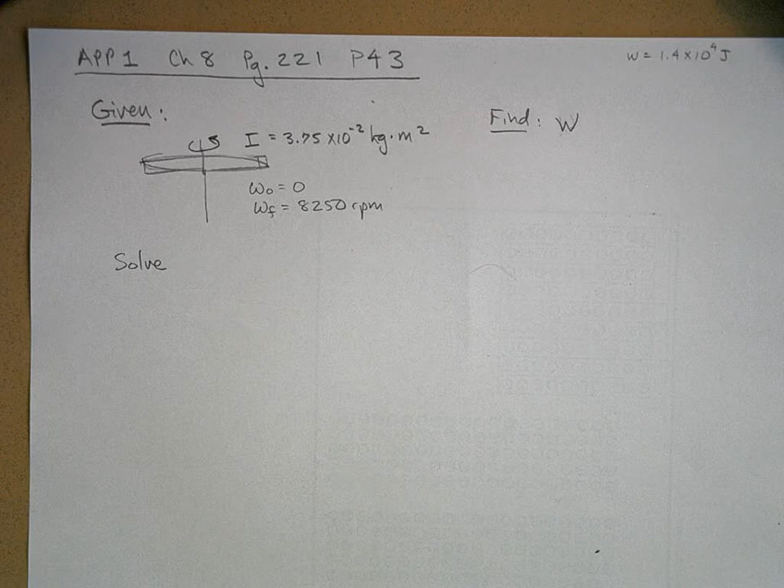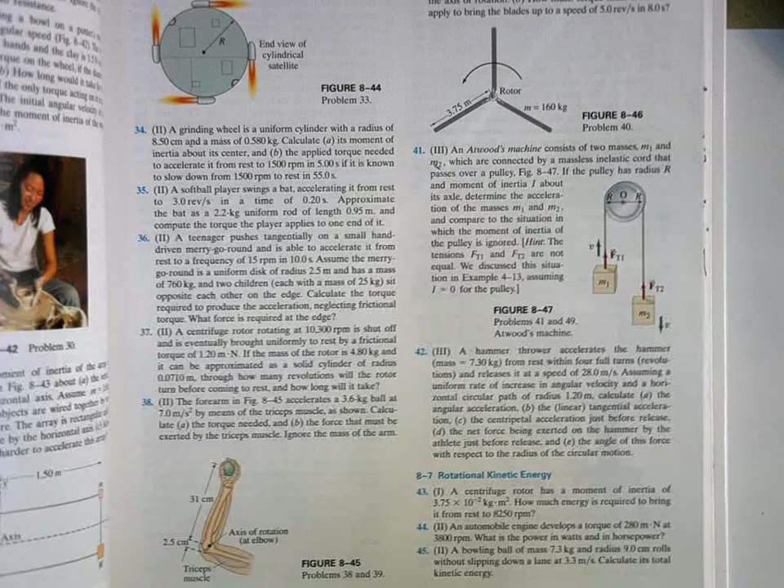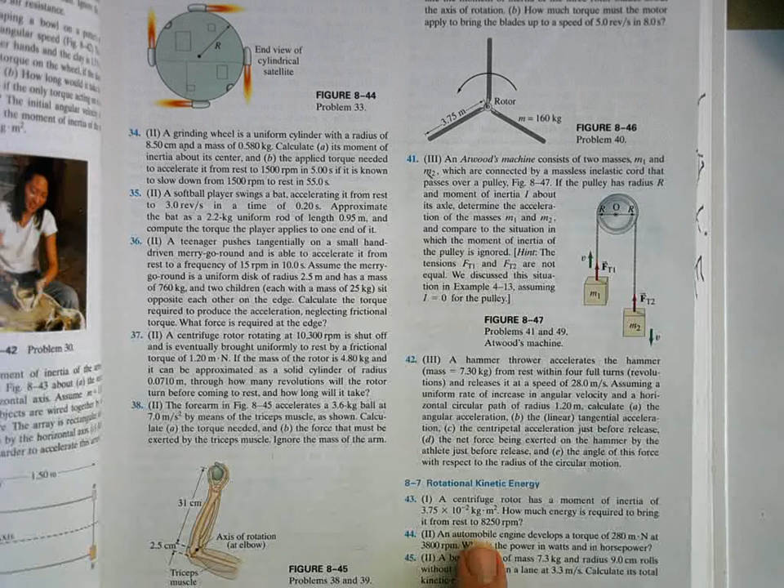Let's do problem 43 on page 221 in chapter 8. And I'll read the problem from the book. Right here, it says, a centrifuge rotor has a moment of inertia of 3.75 times 10 to the negative 2 kilogram meter squared. How much energy is required to bring it from rest to 8,250 RPM?

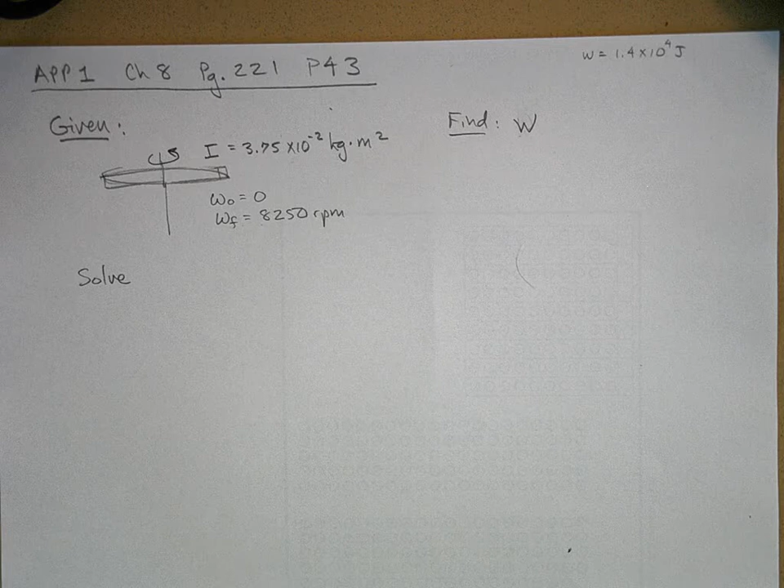So here is the problem. Oh, and here it is. And so we want to know how much work does it take to spin this thing up. So this is just some object. It's a centrifuge, some part of a centrifuge. We're going to spin it really fast. And we want to know how much energy is it going to take. How much work do you have to do to get it to that speed?

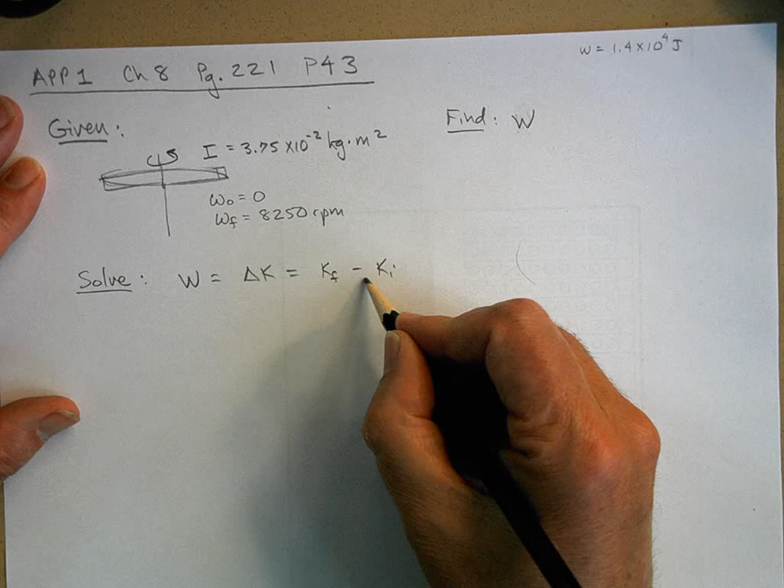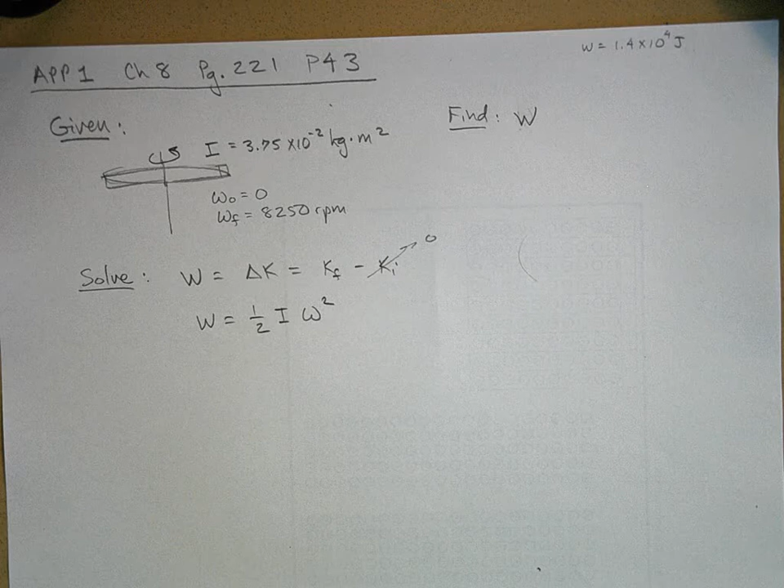So, well, the work done will equal the change in kinetic energy, which is K final minus K initial. And the initial kinetic energy, it starts from rest, so this is going to be 0. So the work done is going to be our final kinetic energy, which is 1/2 I, the final angular velocity squared. And I know what I is. All I need is omega, but it needs to be in radians per second for this to work.

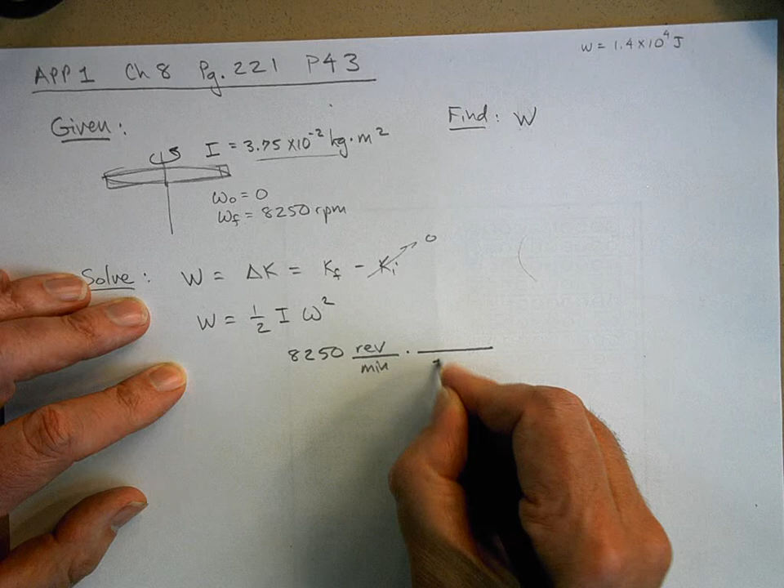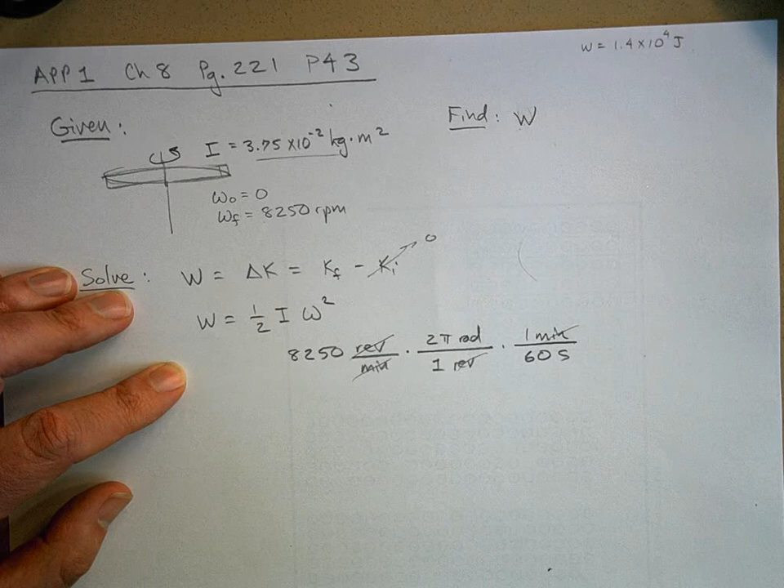So 8,250 revolutions per minute. We got to change this. 1 revolution is 2 pi radians. And 1 minute is 60 seconds. So by doing unit conversions like this, you can tell whether to multiply or divide. Some of you got these a little bit mixed up. So get on it when it comes to unit conversions. The most useful thing you'll learn in here and in chemistry is how to do unit conversions.

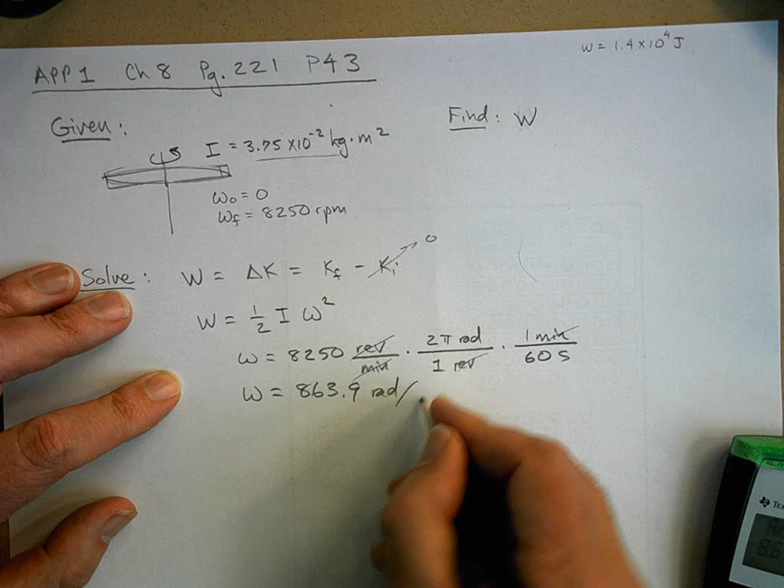Anyway, so this is omega. So omega is equal to, well, let's see, 8,250. Oh, wait, let's clear my calculator. Times 2 times pi, divided by 60 equals, and I get 863.9 radians per second. So now I can figure out how much work is done. Notice I make a capital W, not an omega.

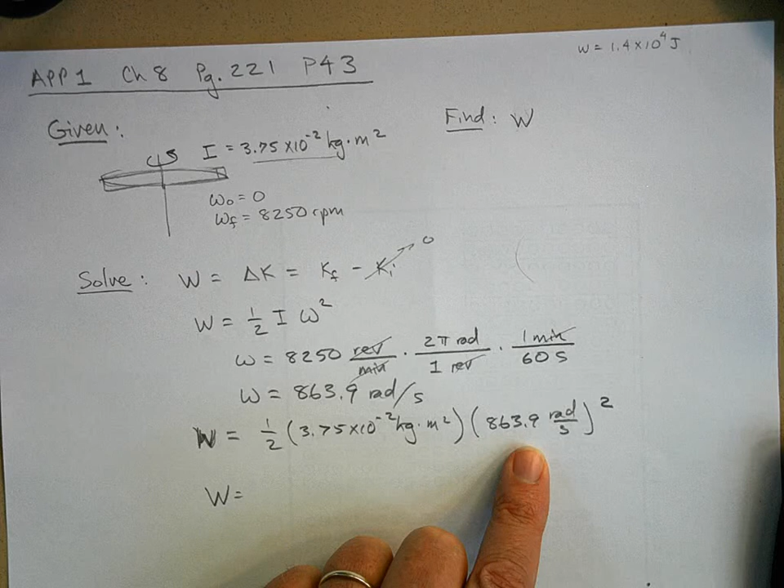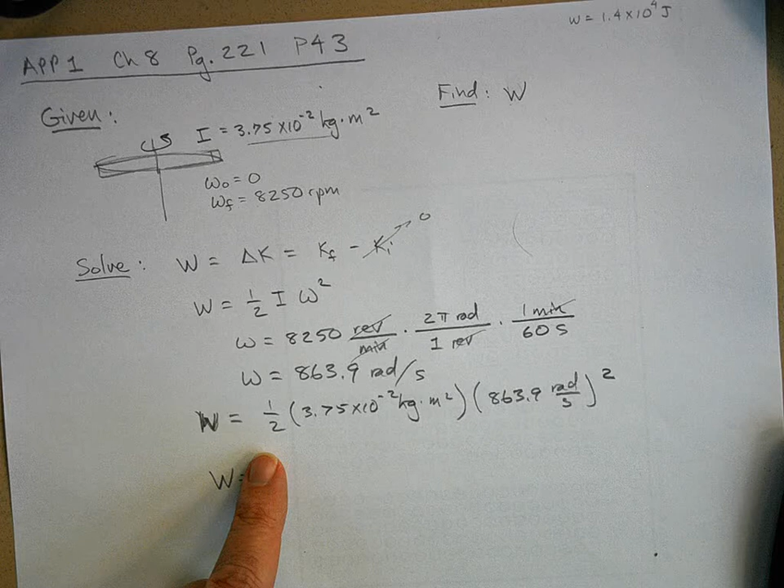1/2. Now what is I? 3.75 times 10 to the negative 2 kilogram meter squared. And then this is 863.9 radians per second squared. So this number is already in my calculator, so I'm just going to square it. And then multiply it by 3.75 times 10 to the negative 2. And then divide it by 2. And I get 1.4 times 10 to the 4.

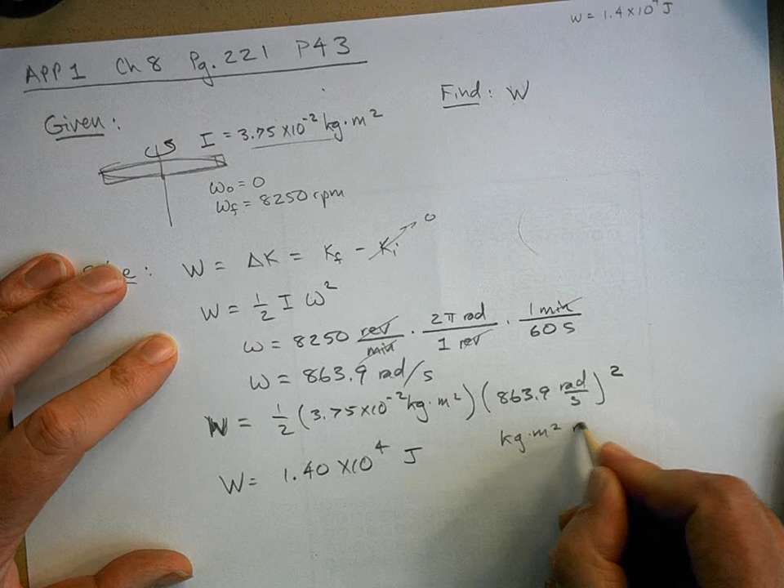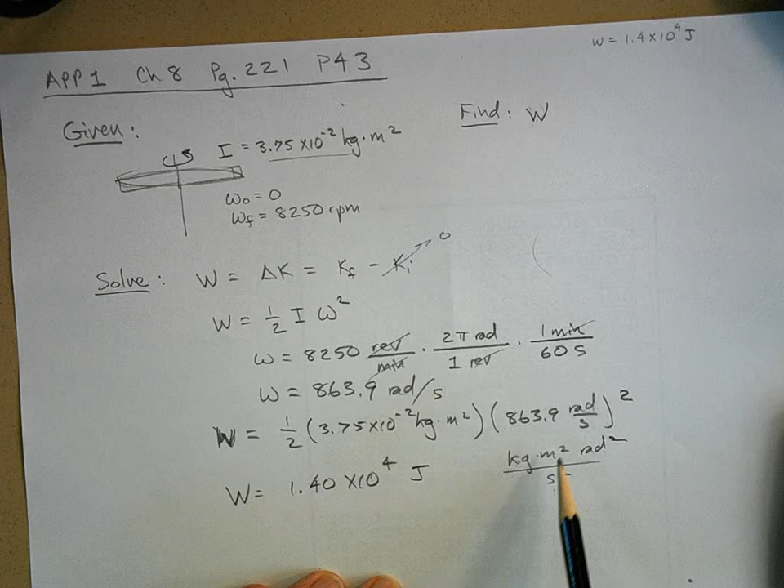Now what units do I get? It's just joules. Some of you left it kilogram meter squared, radians squared per second squared. That's fine, I suppose. But this is a joule. Remember, a joule is a newton times a meter. A newton is a kilogram meter per second squared. A newton times a meter, so that you get the meter squared. And so this is a joule. And then you don't need the radians squared in there to make the thing work out. But anyway, this is our answer.

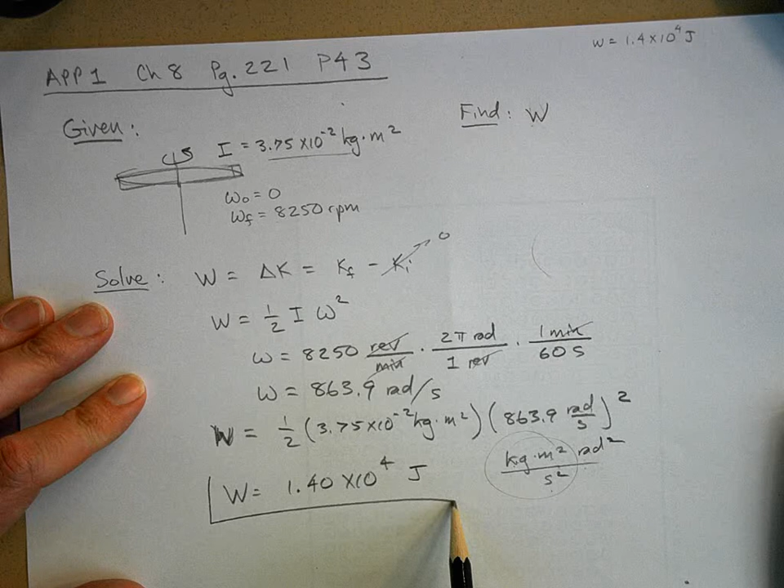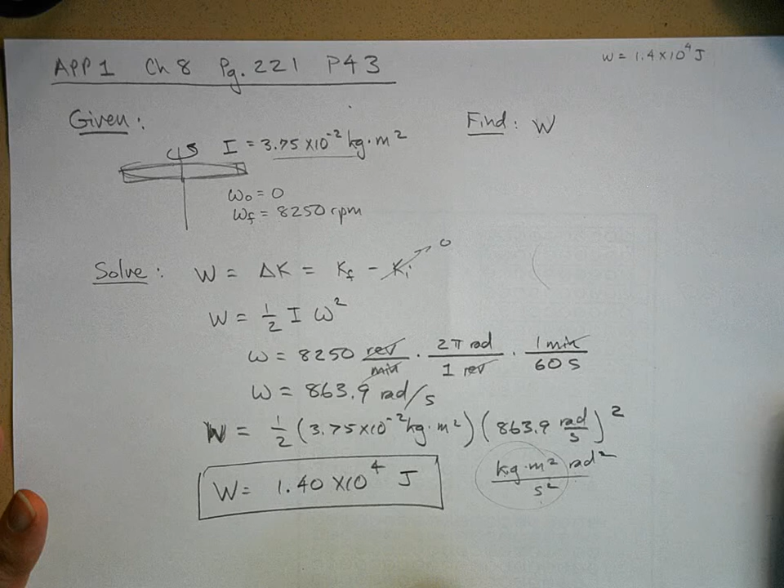One thing, a couple of folks, I think they knew what the answer was supposed to be, but the work got messed up. If you have the correct answer, but your work doesn't lead to that answer, it's pretty severe. So make sure that you enter in the work, even if you know what the answer is, because maybe you whiteboarded it and you remember it. But make sure that your work leads to that answer. If it does, you'll at least get most of the credit. But if it doesn't, I'm going to have a problem with it.

All right. So anyway, if you're doing it as a homework quiz. Anyway, any questions on this problem? All right. That is all.